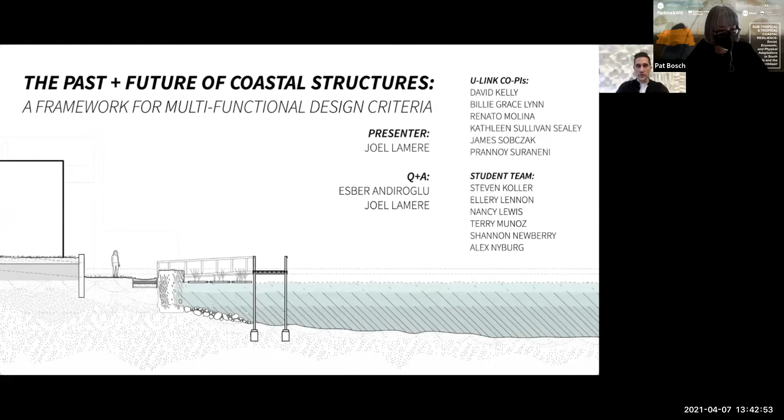The whole point of assembling a team like that is to confront complex problems, right? Those with competing criteria, with many stakeholders. An interdisciplinary team is the only way, I'd argue, to take on resiliency issues, particularly along coasts where so many intertwined problems come into contact with one another.

And so that line along coasts is where we dove into the problem as a team. Specifically, we focused on coastal structures. Now, we know this is only a piece of the larger resiliency puzzle, but we considered it a critical one, and one where actually it's a lack of interdisciplinary thinking which has given rise to so many of its problems. The failure of past walls has had something to do with their lack of multifunctionality, we'd say. They're conceived as single-purpose engineering marvels rather than players in larger ecosystems.

So our team set up a process revolving around incorporation of our many disciplines, one that had as many inputs and design criteria as members of the team, but that also incorporates a feedback loop of assessment and analysis, including economic analysis.

Our team started simply by looking at what is around us in South Florida. We traveled to many sites that exemplify a range of strategies for coastal protection. We saw, for instance, historic and contemporary seawalls, natural and green-gray systems, as well as various remediation efforts, which we documented, then analyzed in terms of management processes, restoration efforts, and protection strategies.

All this helped gain a better understanding and common language around coastal structures, of course, but more importantly, helped us organize the narrow set of design criteria for the wall types currently in use.

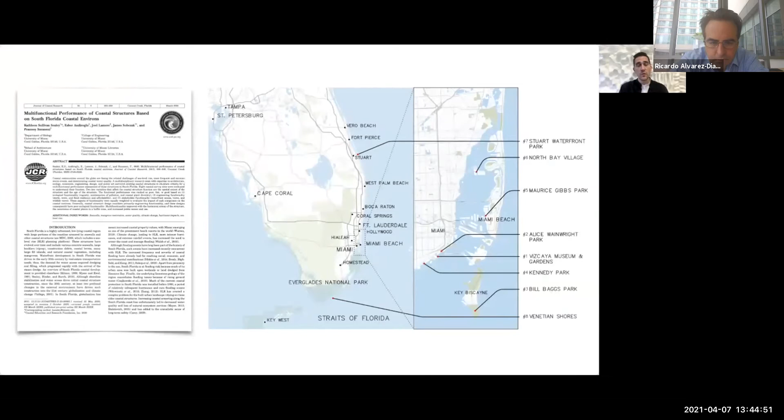This in turn led directly to a provisional framework for scoring seawalls in terms of these structures or criteria. That was the subject of our first published paper, Multifunctional Performance of Coastal Structures Based on South Florida Coastal Environments. In the paper, we gather and organize the documentation of each of these sites—there were 8 in all, including site-specific variables—and then we assess the walls along several axes, leading to numeric scores that we can then compile.

In keeping with the setup for our whole team, we needed to understand these structures in terms of multiple functions. The first of these layers, maybe the most obvious one, is the engineering functionality. This is pretty easy to understand: we need to know how well these structures are doing their basic job of protecting the shore from the influx of water due to tides and storm surge, how well it is retaining the land, and so on.

So the assessment criteria we used to score each wall included some obvious measures, width and height, but we also wanted to include an aspect of affordability in this, insofar as the engineering design has a say in the cost of the structures. This is really important to capture when you're analyzing coastal structures.

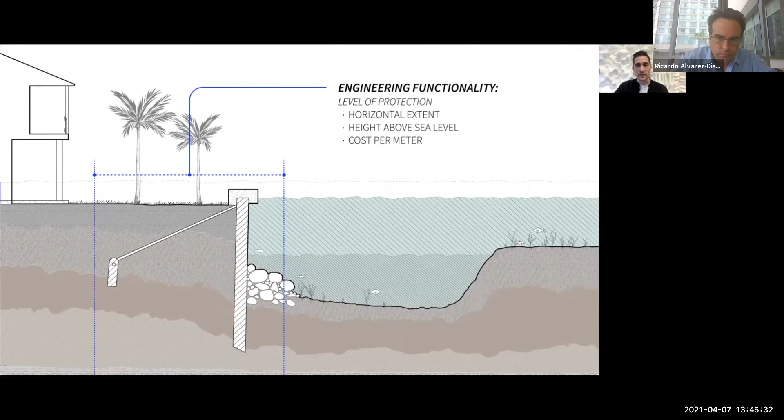The second layer of functionality we are calling the ecological functionality, which is to say, how the structure positively or negatively contributes to the overall ecosystem health. Obviously, there are several metrics we could have used for that as well, including rugosity, which is a measure of its textural depth, key for marine growth on that surface.

We also settled on figuring out how well the wall helps in the management of stormwater, which comes with all kinds of potential ecological impacts. And we even looked at diversity of nearby plant species as one assessment criteria.

The final layer of this assessment was in terms of stakeholder functionality, which is to say the value that these structures have to residents or other people who are directly in the vicinity and affected by it. The criteria here could be really broad, but we wanted to focus on questions of its public use, the quality of view that it allows, which according to a survey we conducted was of critical importance to users and property owners. And here we even looked at the diversity of bird species nearby, part of a metric of desirability, let's say.

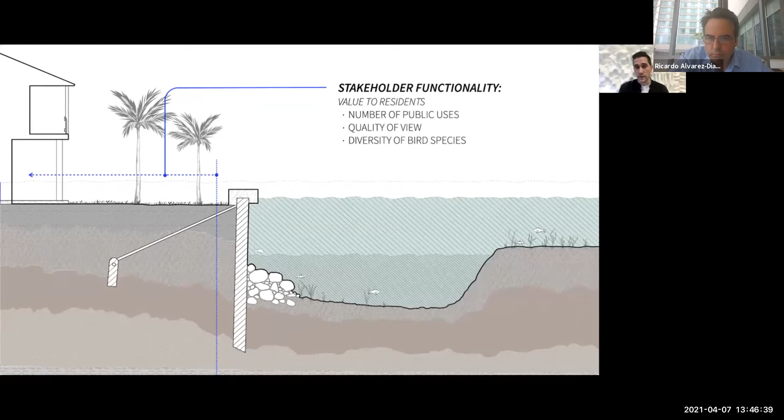So the paper compiles all of those assessments, scores them, and creates a composite total for each structure. We also included narrative descriptions to paint a full picture of what we observed, and we conclude the paper with a rigorous ranking based on the composite score of these existing structures, which also helps us sort, in very broad terms, which coastal strategies are more effectively addressing multifunctional demands.

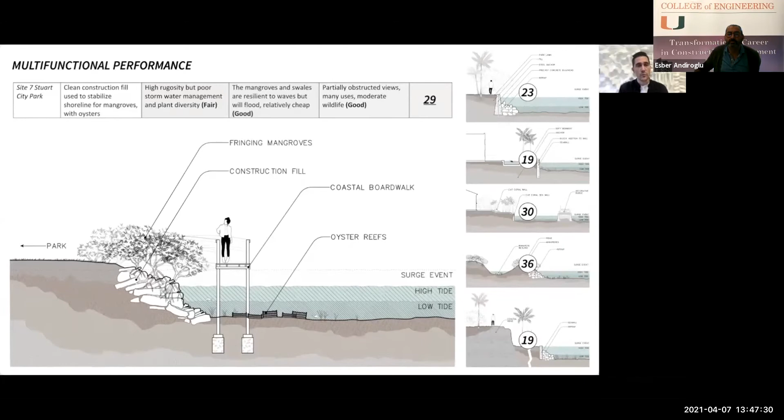And that's the real accomplishment of the paper, right? This framework for multifunctional assessment. That's why it's the key foundation from which a few other studies are naturally springing for us. This framework allows us first to assess the multifunctional performance of other seawalls. That's pretty clear. But also, very importantly, it works as a tool in the design and planning of new coastal interventions. This work is not purely for retrospective purposes, but meant to help us consider how to proceed in the future.

So that's what we're doing. One of our ongoing studies is a comprehensive mapping and assessment of the existing structures for all of Biscayne Bay. This involves a lot of spatial modeling, creating GIS polygons for each segment of the coast, and including attributes that include the type of coastal structure at each location, its condition, its jurisdiction, and of course the various functionality assessments based on our framework.

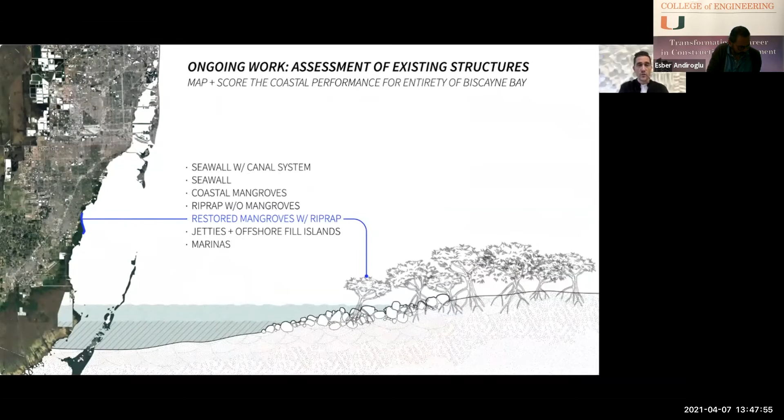We've also been using the assessment framework in preliminary ways to address site-specific concerns. It should, as we already said, be able to inflect how we design for interventions. So we were working with North Bay Village as a community partner to conduct research related to their needs at several sites of their choosing.

For those that don't know, North Bay Village is a set of islands nestled in Biscayne Bay between Miami Beach and Miami proper. The whole island is hovering really just a few feet above the current high tide and is already grappling with many of these issues associated with sea level rise. So really, it's an urgent need for them to start to address these questions.

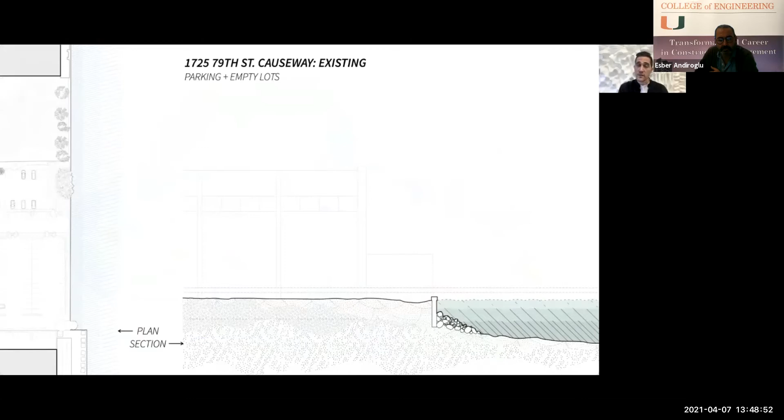One of the things we are doing for them is to simply look at several sites they have chosen for potential redevelopment and ask questions about how our observations and this multifunctional assessment framework might guide the design of coastal structures at the edges of those proposed or potential developments.

So, rather than thinking of a seawall as a kind of pure barrier or a single line, we really want to consider it as an important piece of a larger territory, one that interacts in all of these important ways with the local ecosystem. So in our proposal, we've assembled many of the components of successful strategies we've seen elsewhere.

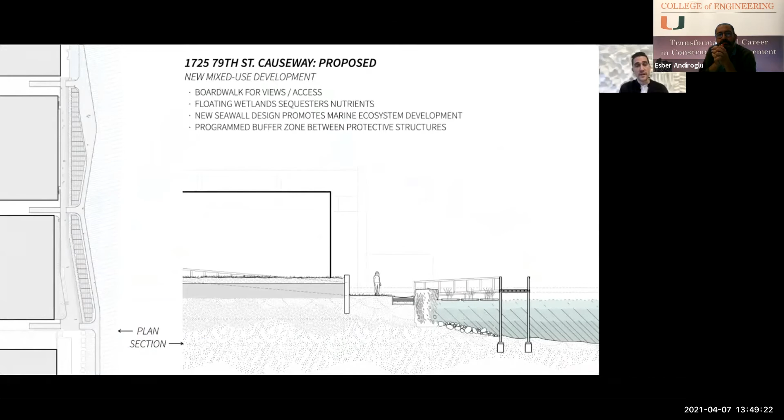In hopes of producing a zone at the edge of the site. This is not just ecologically forward thinking, which it definitely has to be, but is also responsive to stakeholder and engineering interests in inventive ways. Each design component really is meant to serve multiple functions in that way.

So for instance, the boardwalk, which serves to augment views and increase water access, both of which are highly valued by residents, also acts as structure and protection for a series of floating wetlands that help sequester nutrients. The seawall, for instance, is designed obviously as a protection, but also designed to promote marine ecosystem development.

And importantly, there's a buffer zone between protective seawalls. So we saw that if you can use depth along that coastal edge, you will be much more protected in many ways. But the key to using that correctly is to also program that zone, allowing people to use it for play or activities or retail. In that way, the space isn't lost, so to speak, in terms of the stakeholder value.

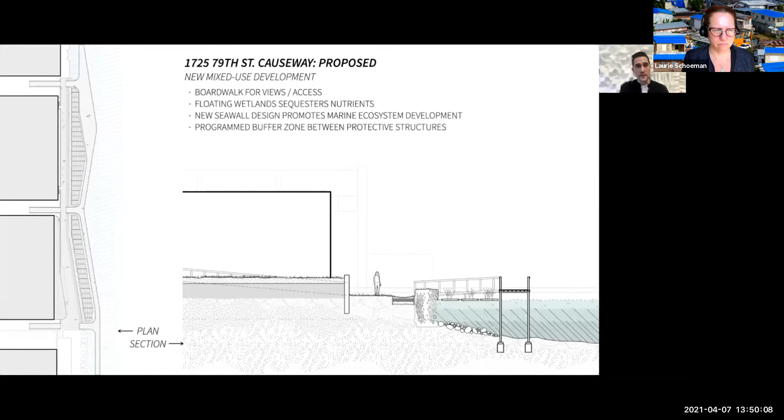And that brings us really to the last part of this presentation. The design work makes it very clear that there is a missing step: there should be a design guide that allows for comparison about the many options available for coastal structures. We identified this as a major gap in the process for designers and engineers who are tasked with taking on these complex problems, in a way that there's this litany of possibilities, but no way to compare and contrast from one to the other in a standardized way, which would be helpful as a designer.

So in response to this particular need, we began to create something like a design guide, a catalog of these past and future coastal structures.

So in order to be functional in this gap, in order for it to fulfill this need that we've identified, the guide needs to catalog coastal structures of many kinds. Conventional hard infrastructure, green-gray strategies, natural barriers, and so forth, but also the range from historical and existing structures to contemporary and emerging strategies that rely on newer technologies.

For each of these entries, it has to provide a useful summary of its overall value. It includes a narrative description for those things that can't be reduced too easily, but also a data-driven assessment, including our scoring for multifunctional performance. We basically need to be able to compare all of these coastal structures across the various criteria identified in our rubric.

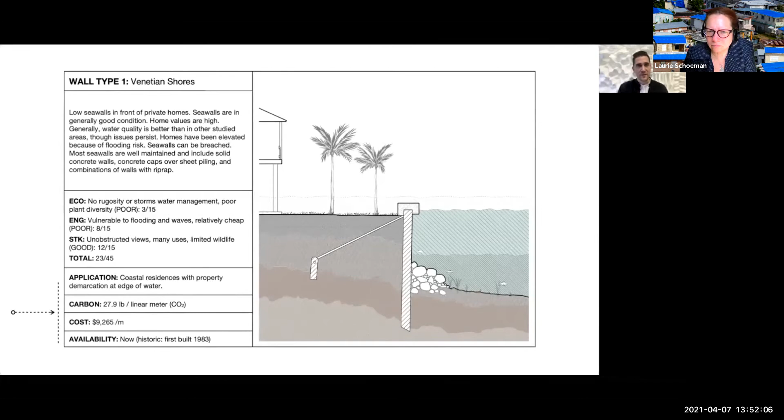We really need to put them side by side to rank them in these terms. And then we've included a few other clear metrics, including use case, carbon footprint, construction costs. I'll point out here that we've also included a line for availability, where for emerging technologies, we can indicate how many years away the technology seems to be. This is, of course, in some cases less certain than others, but we feel strongly that the kind of longer-term thinking necessary for addressing issues of resilience and climate change only works if we can see into the future a bit. We have to know what is on the horizon to know how we should act today.

So the catalog is ordered somewhat chronologically, beginning with the historical structure that you see on the left. That was one that we saw. And then leading into related contemporary structures and developments like the one on the right.

In this case, a University of Miami team, that includes 2 of our U-Link team members, developed a modified wall that uses GFRP, which stands for glass fiber reinforced polymers, instead of steel for rebar and tiebacks. The advantage here is pretty obvious, where steel corrosion is a massive problem and the cause of many seawall failures.

Critically, this design was included as one of the approved seawall design options in recent changes to the North Bay Village zoning code, making it an instance where research outcomes were directly merged with community needs through a collaborative process. And because it is an established innovation, there's good reason to include it in our catalog among other available strategies.

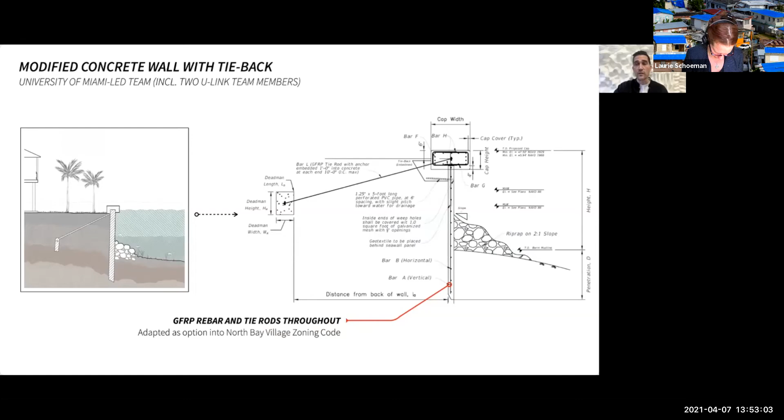And if we think a bit further out chronologically, we find some innovations that are currently under development, not too far away from being functional. For instance, this seawall cap for retrofit and repair purposes. There's a massive number of existing seawalls that are mildly damaged or simply too low, but maybe aren't in such bad shape that they need to be completely replaced or torn down.

Because that's the case, many people have been looking at the possibility of producing custom caps that add height to deal with sea level rise, cover flaws, and even potentially shore up the structure itself. And in keeping with the multifunctional theme running throughout this whole presentation, these caps might add other functions in this retrofitting process, like filtration systems for dealing with runoff, or planters for sequestering nutrients, or textures to encourage marine growth through rugosity, and so on.

More or less as optional add-ins to the cap itself. The development of these custom caps is already underway and maybe just a couple years out and are listed as such in the catalog. But there are some new technologies that are right on the horizon that promise to fundamentally alter some of these strategies.

So for example, in a few years, 3D printing concrete seawall caps may be possible. We already see 3D printing of concrete in domestic applications. And this promises to be cheaper and more effective. So as a designer, it is useful to have a kind of time horizon for this technology.

Maybe it's better not to dive into using the previous caps that we showed, which would require a ton of measuring, custom formwork for every single different seawall, offsite casting and shipping to the site, when you could instead scan a wall to get a digital model of the exact existing geometry, then use a parametric process to define the layering patterns, and then print directly in situ.

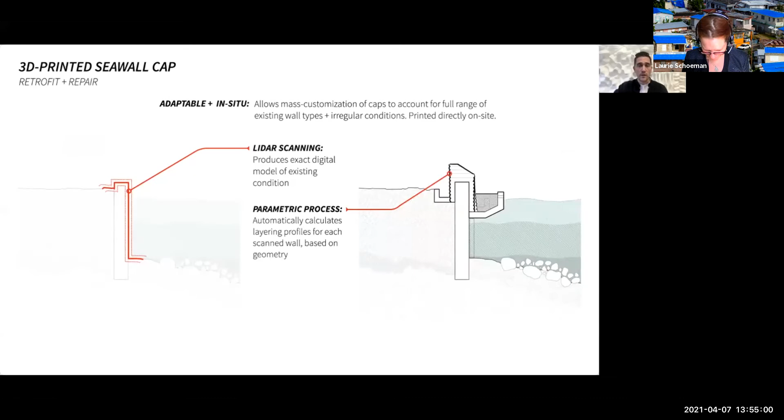And eventually this 3D printing process will be useful for even much more robust purposes. You will be able to engage both water and structural functions directly. So rather than just a cap, you will be able to produce full walls in this way.

So we should admit that some of this is in a very fundamental research phase, and so it has to be a guess about how soon down the line this may be possible. We're not going to know that exactly. We have listed 5 to 10 years in our chart here based on the rate we've seen other concrete 3D printing applications evolve, but who knows exactly? That's why we consider this a living document that will need continual updating to reflect evolving knowledge.

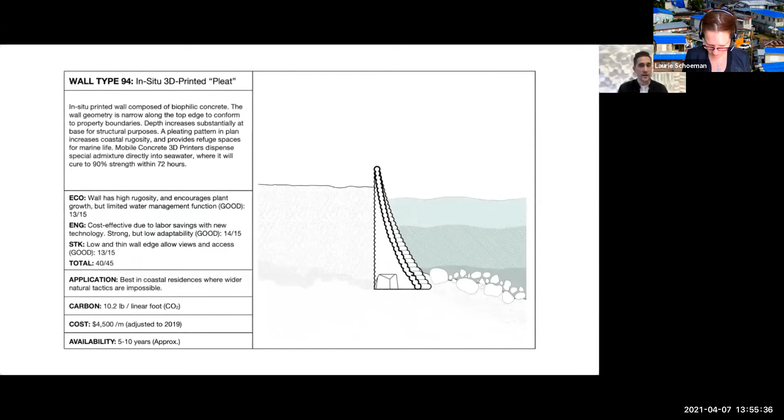As a team, we've been looking at what those walls might look like, these 3D printed seawalls. Much of my own research is in digital fabrication, emerging means of construction, and the relationship between form and structure. So this has a pretty direct relationship to that.

I've come up with what I'm calling the pleat, just to exemplify one such possibility of a wall. The premise behind this project is that it's 3D printed in situ, meaning it doesn't require any formwork and minimal excavation and shoring. The profile itself reaches a linear edge at the top to maintain the definition of the property line, but gets thickened or deepened at the base.

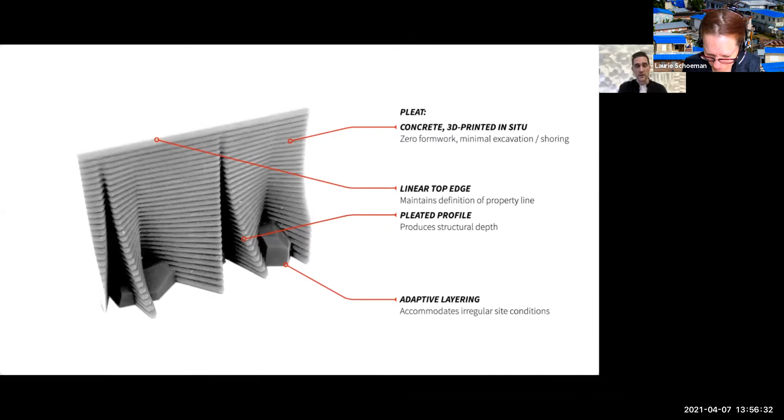For obvious structural reasons, to resist overturn and the like. And it wouldn't be a 3D printed wall if it didn't have some sort of adaptivity or adaptation built into it. The idea here is that adaptive layering would allow for the many irregular kinds of site conditions experienced at shorelines.

You'll notice there's real optimism in this catalog. The further we get out chronologically, the more we see designs that are truly multifunctional and therefore score higher in our assessment framework. So long as the technology continues to develop as it already has, we can hope to arrive at schemes like the one I've designed here eventually.

Within a single wall section, this one is trying to take on three major tasks: filtration, structure, and the production of a well-calibrated marine habitat. This concrete sponge is a continuous shell, which is an extremely efficient structural type using very little material to maximal ends. It's a single print that performs varied functions, deploying material resources sparsely but effectively.

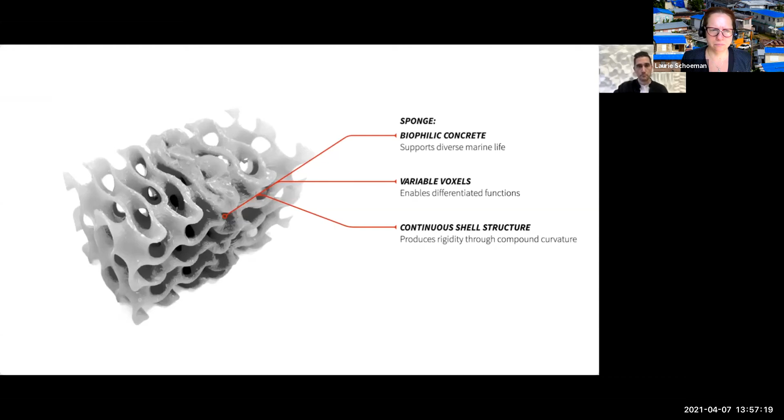I want to conclude by reiterating that this catalog is a work in progress and will always be a work in progress. By definition, it needs to be a living document. Our hope is to get it up to at least some distributable quality level soon, though, as is the case with some of the wall designs we've already shown here, the timeline for that distribution would be a bit speculative at this point.

Thanks, and I look forward to answering any questions you may have during the Q&A, where I will be joined by my colleague, Esber Andiroglu.

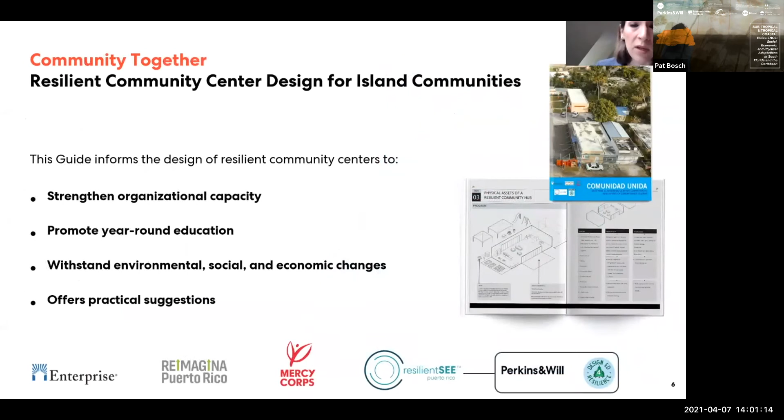I'd like to point out an important resource that we've led with many collaborators, which you see here on screen. It has guided our work with communities seeking to create resilient community centers. The guide answers the question: what is a resilient center and what attributes should it possess? It's organized in four parts, beginning with organizational capacity, operations, and physical assets. My personal favorite is chapter 4, which covers a diversity of exemplary case studies.

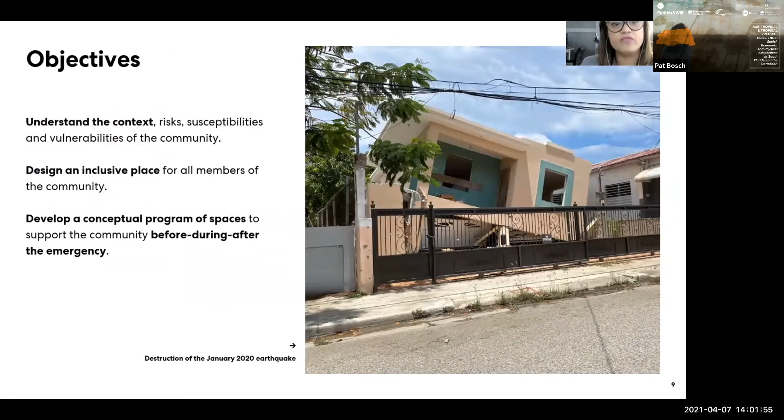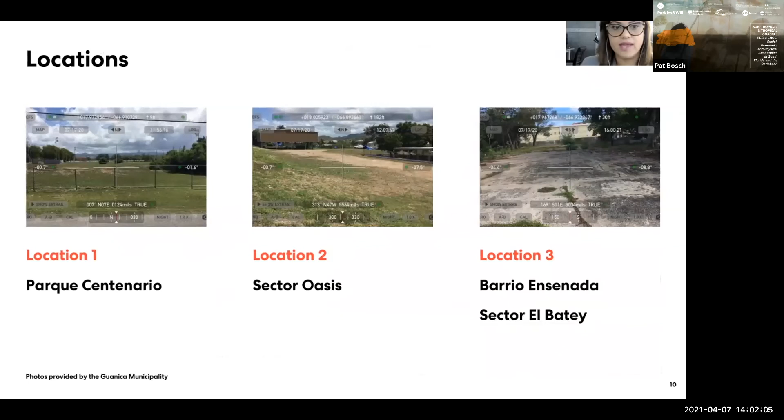The objectives of this project revolve around co-creation, and to do that we had to understand the context first, to design an inclusive space and develop a conceptual program of spaces to support the community before, during, and after the emergency. In working with the municipality, they offered these 3 locations. Each site is within a neighborhood and offers development areas ranging in capacity. In the larger picture of the municipality limits, they are located as shown and can shelter the target vulnerable population desired.

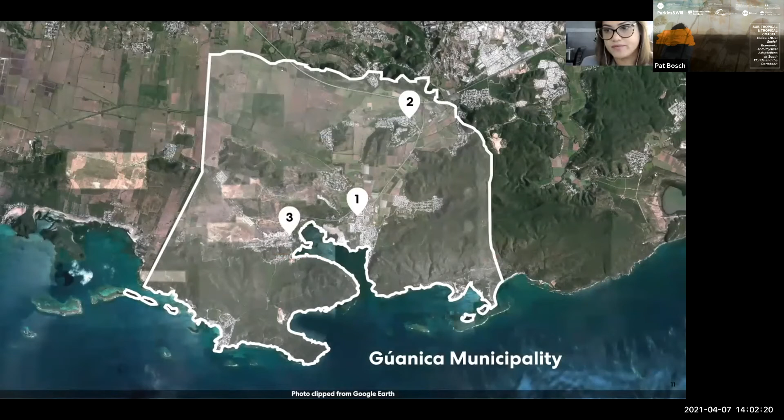In the past 3+ years, the island has experienced severe hurricanes, a major earthquake, even a meteorite, which luckily landed in the Atlantic Ocean, and of course the global pandemic. Guánica is susceptible to flooding, landslides, and structure collapse. It has vulnerabilities such as formal and informal settlement damage and collapse, population displacement due to flooding, compromised health, safety, wellness, communication, and food supply disruption.

You can see here the severity of the earthquake damage in informal construction.

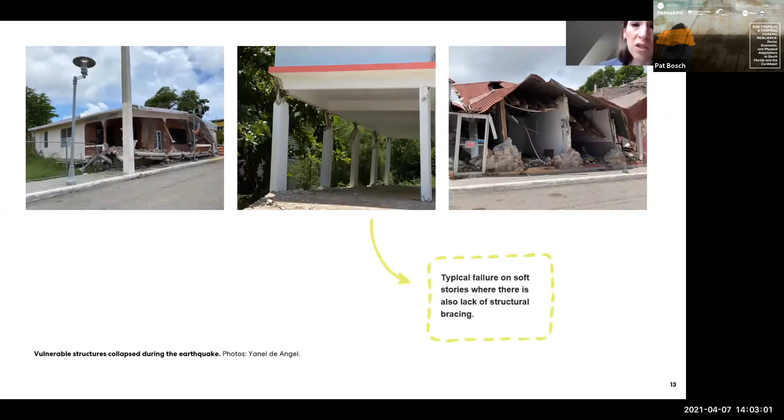As we consider inclusive design for a vulnerable population, we ask some critical questions to enable discussion. Who is this population seeking shelter? What do they bring with them? What do they fear? What health issues might they have? And how do they navigate the shelter once they are there?

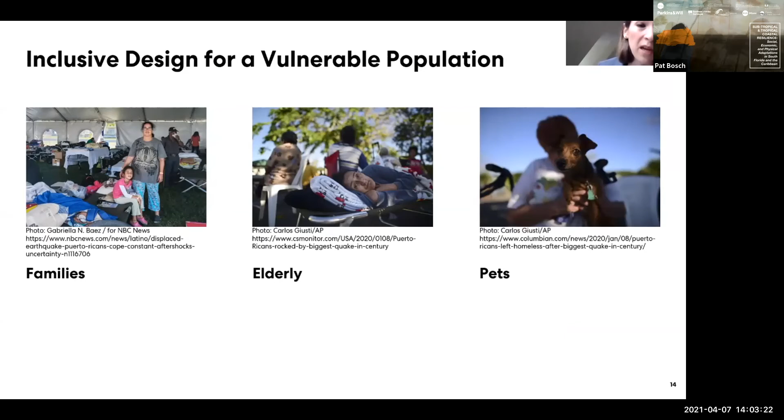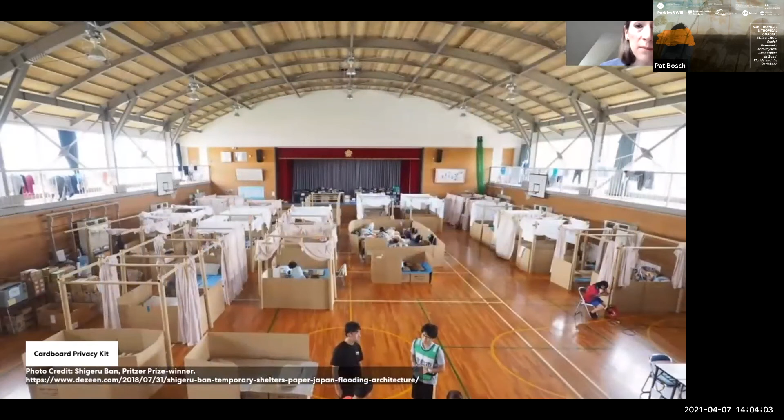From the precedents we studied, this Japanese system really stood out for speed of assembly, affordability, flexibility, and the privacy it provides. It's a simple modular cardboard system with curtains for privacy. It's very close to what we had in mind, and you'll be seeing that coming up.

Hello again, I'm Danniely, visiting lecturer at the University of Illinois and the Rhode Island School of Design, and a collaborator with Resiliency. In our proposal, we achieved a sizable capacity for the 3 shelters for each emergency scenario, hurricane and earthquake. Since the municipality may apply for FEMA funding, we also tallied the occupant density for the FEMA Community Safe Room.

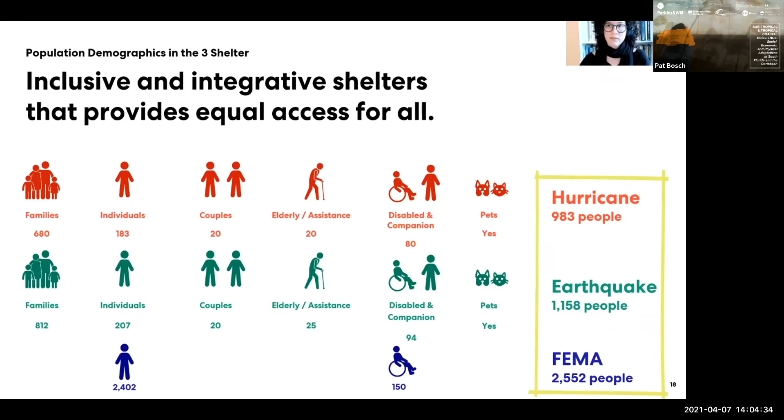The project team created a holistic, replicable, and scalable shelter framework composed of key elements. The shelters function as independent community centers with programs that serve the community, including 1, 2, or 3 basketball courts for multi-purpose activities. The centers transform into shelters during emergencies.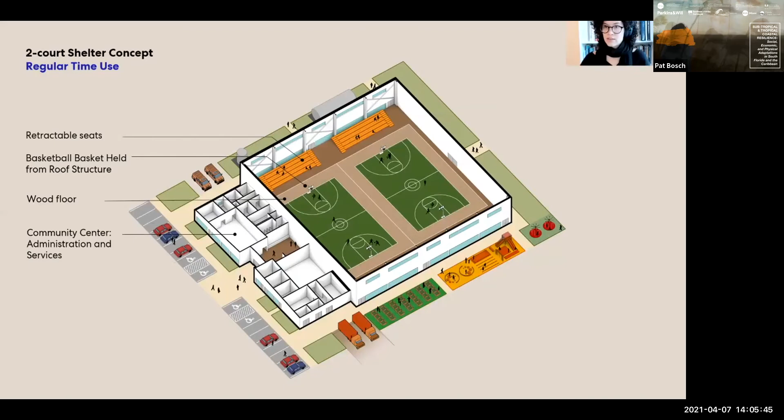For year-round use, we integrated inclusive spaces for all, including a mother's room, a quiet room for people with sensory sensitivity, and a fully accessible adult changing room that doubles as a gender-inclusive bathroom.

During a hurricane scenario, before and during the event, the main services are contained within the building, as well as the shelter space. The colorful volumes represent various sizes of temporary shelter units. Temporary toilets, sinks, and showers are shown in purple and blue.

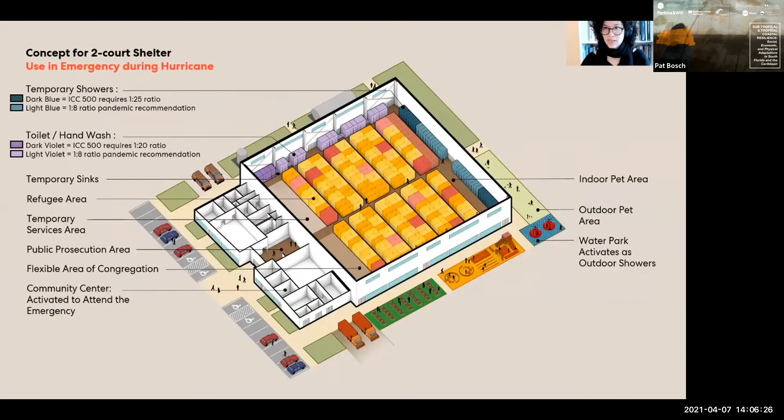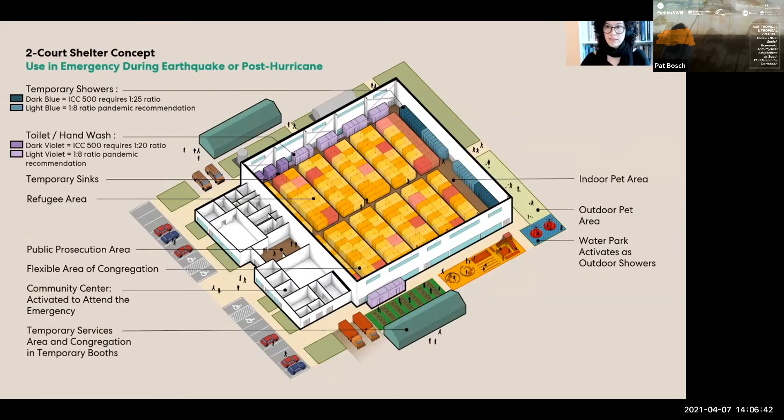After the hurricane, or during an earthquake, additional services can take place in outdoor temporary tents to increase occupant density. I want to note that our team incorporated COVID-19 provisions, anticipating the possibility of a combined natural disaster and pandemic event.

I am José Sanchez, Senior Engineer at Tipping Structural Engineers and co-founder of Voluntariado of Engineers and Professionals of Puerto Rico. This axonometric view depicts the structural system of the shelter. The structure consists of concrete in the front, where the entrance and offices are located, and in the back, the structure was designed as structural steel to provide large open areas at the main shelter area.

The shelter was designed per the Puerto Rico Building Code 2018 version, considering the hazards of the island, including hurricane wind load forces and earthquake demands for the area of Gúanica. This shelter was designed to resist winds up to 182 miles per hour and seismic demands up to 1 G of force. To put this wind velocity in perspective, it's 3 times the velocity you are allowed to travel by car on a highway. These speeds result from revisions made to the code after Hurricane Maria hit Puerto Rico in 2017.

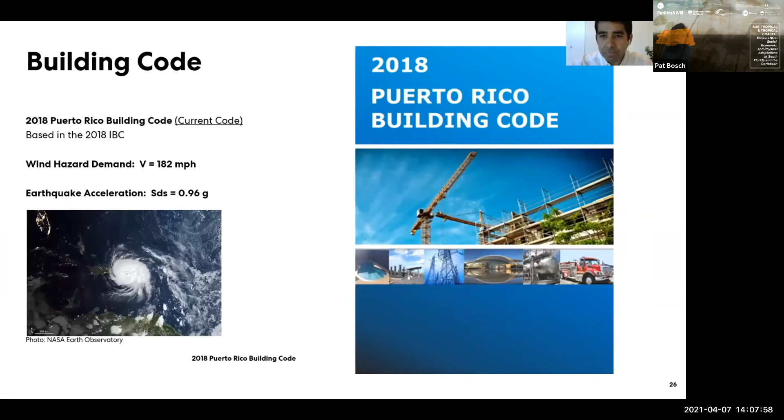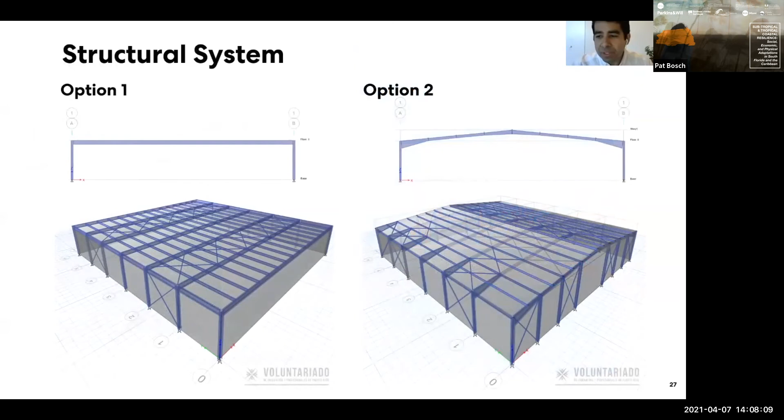Two structural options were considered during the design phase to provide flexibility and strength for the building code, shown in these two images.

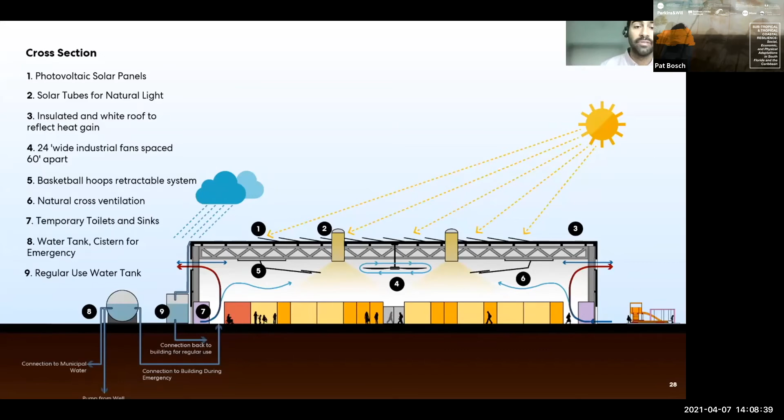Hello again, I'm Manuel, licensed engineer, resiliency collaborator, and analytics lead for WSP's Built Ecology Sustainable Design Practice. This section illustrates different resilience strategies, including passive survivability through harvesting natural light, natural ventilation, and daylighting. There are also water cisterns and renewable energy to allow the center to survive for a few days independent of municipal services.

Before estimating water and energy loads for all 3 scenarios, we first determine occupancy during normal operations and sheltering events that will drive resource consumption.

We follow ASHRAE 62.1 occupancy rates and supplemented our findings with FEMA's community safe room guidelines during emergency response. Preliminary loads follow USGBC's LEED design guidelines for indoor flushing and flow fixtures, as well as water use.

A supplemental water balance calculator was included to estimate the water storage tank needed to satisfy a 3-day blackout demand, and rainwater capture potential for each scenario.

On the energy side, preliminary loads follow ASHRAE 90.1 and ASHRAE fundamental handbook guidelines to determine schedules, lighting, and equipment power densities, but also human heat generation to estimate cooling load during sheltering events and normal operations.

Lastly, using Ensenada's Gúanica weather file and PV Watts software, it was determined that 20% of roof space dedicated to solar PV can provide net zero operation during business as usual, and offset up to 88% of energy demand during emergency operation.

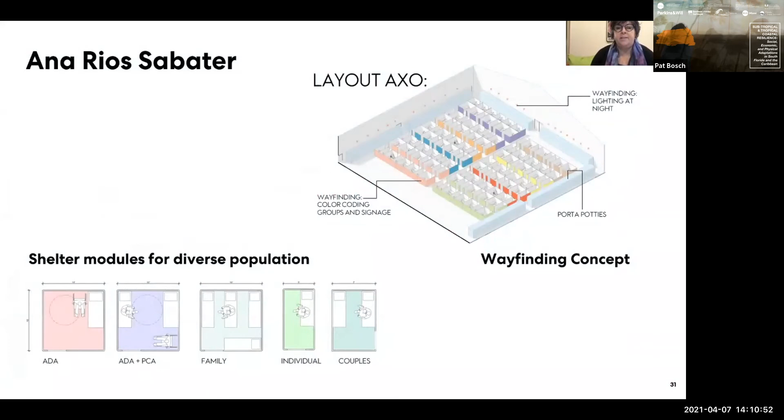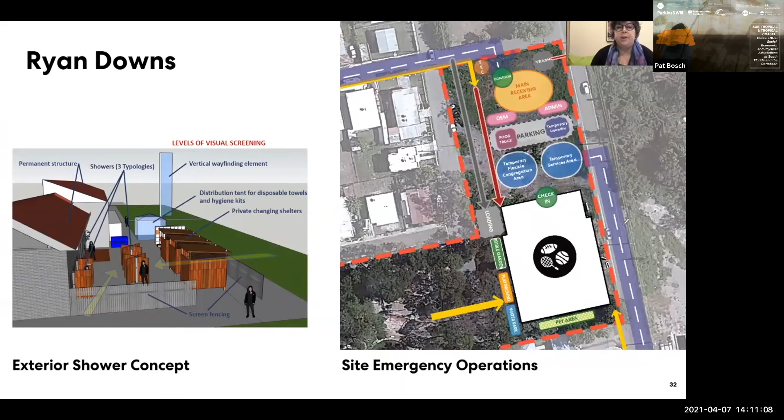Ryan Downs, a student and registered architect with prior FEMA experience, developed a site logistic plan for emergency operations and an exterior shower concept exploring levels of privacy for inclusive design.

I developed the operational policy based on my expertise and prior experience as an architectural designer for the Institute for Human-Centered Design, an international inclusive design nonprofit.

With IHCD, I co-created an ADA and inclusive emergency community shelter checklist and policy program. It incorporated ADA, FEMA, and inclusive design requirements and recommendations.

We learned that remote collaboration is a powerful way to connect professionals to contribute expertise. We highly recommend engaging academic partners. The BAC brought a different perspective, depth, and genuine investment in nourishing the next generation.

We also learned that a facilitating municipality is critical, but needs to be paired with community-based organization involvement. We recognize there are many obstacles, inequities, and unfairness in providing direct relief to communities, but we are determined to help overcome them.

We want to thank the former mayor of Gúanica, Santos Seda at the time, Reverend Benjamin Toro from Bet El Torre Fuerte Church, and Juan Carlos Alvarez, FEMA Municipal Supervisor, whose collaboration was critical.

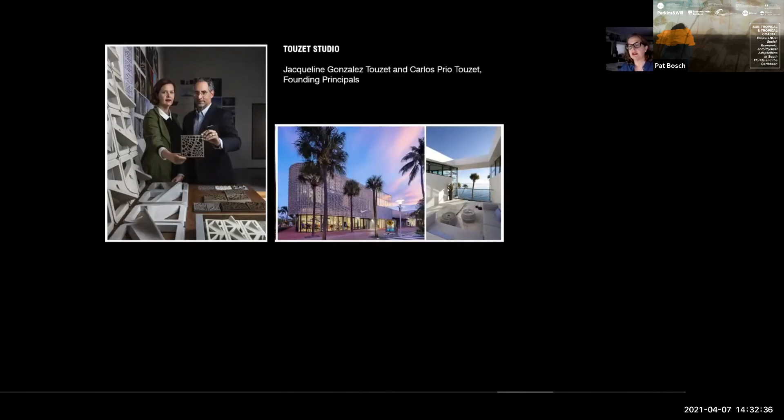Something we're very passionate and fond of, because both of us are Cuban - born in Cuba, but we've been practicing in this region for all of our professional lives, with some exceptions in Europe and Asia.

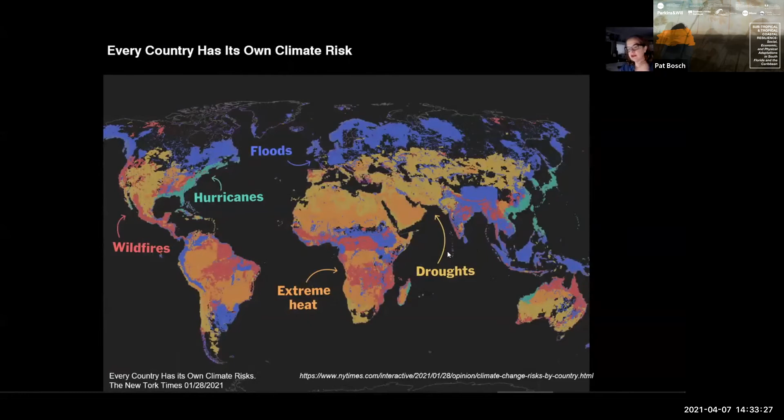What I want to talk to you about today is that sometimes people ask us, well, why would you practice in Miami? Our response is, show us a place on the globe that isn't going to be affected by climate change. This is where we're from, and we're very proud of being from here. Granted, our challenges are not small, they're quite intense, but I think everyone agrees we're all facing quite a few challenges. The New York Times says every country has its own climate risk, and this region is probably expert in designing already for some of these risks.

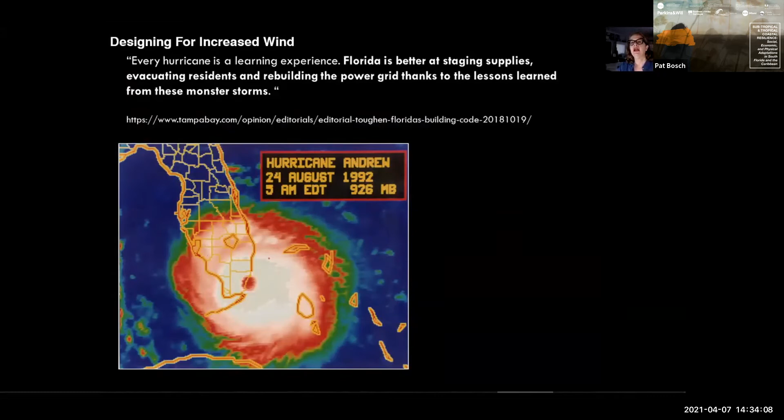One of them, of course, is wind. I came of age and graduated in 1992, the year of Hurricane Andrew, and that was an incredibly powerful learning experience for me. It really shaped the way I view the importance of design, architecture, and codes in saving lives and preparing a region. We learned that this type of experience, and we have centuries of it if you're from this region, if you do it right, you can learn to be better prepared for the next one, and become expert in a way at community resilience from understanding what happened.

What was important about Hurricane Andrew is that we changed our code as a result of what happened. We understood that certain areas got much more damage than others. What was really powerful was that architects set about understanding, well, what can we do? What can we change in our code to make us safer the next time?

If you look at what we did, some of those things were very simple and inexpensive, costing pennies or a dollar to put a strap on a rafter, change the type of fasteners, the spacing, enforce the code to make sure people weren't cutting corners. As a result, we became the model for the region on how to build stronger, more resilient, because if you don't get as much damage and can come back faster, by definition that's more resilient. So some of those lessons don't need to be expensive, though obviously some of them are.

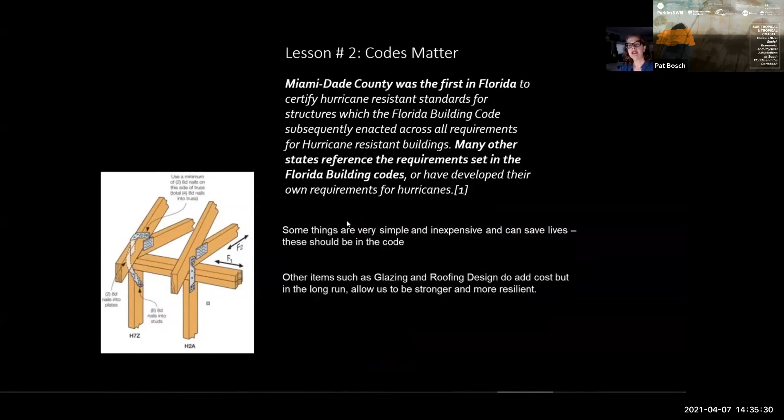If we had sat there back in 1992 and really thought about how much money it was going to cost to put impact-resistant glazing on all our skyscrapers and new buildings, I think we would have all been very daunted by that. But in fact, we did it. As a result, we're in a much better place than we would have been, and we're much more viable as a community, and we continue to grow because of that investment we made then.

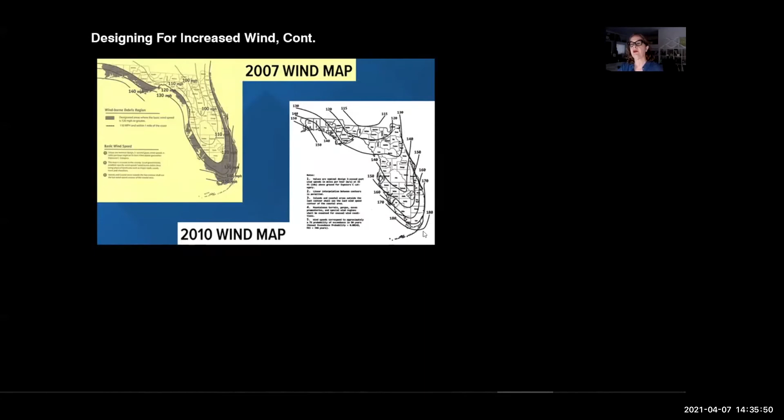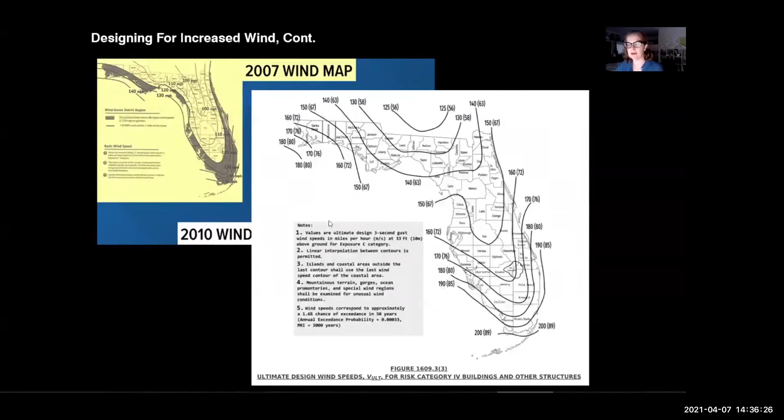That's what I'm hoping to see us do when it comes to resiliency in other areas, whether it's water or being more sustainable, so we can minimize the overall damage that's coming. But water is not an easy one. I won't get into it too much since I'm sure it's being discussed at this conference in depth, but water is coming from everywhere, basically, and how do you design for that? What does that look like? That's one of the things I really want to show you—what it can look like, and what cities are asking for and what we're doing.

We know there's a lot of lessons from early builders, and I'll say this as a proud Caribeña - we are experts since the earliest Tainos built on this land, to the Cuban Americans, to the Bahamians. So many builders came to South Florida. The Bahamian builders were called the Wayfinders, who built much of what we know as Coconut Grove. All of those lessons are important and valid, and we learn from them.

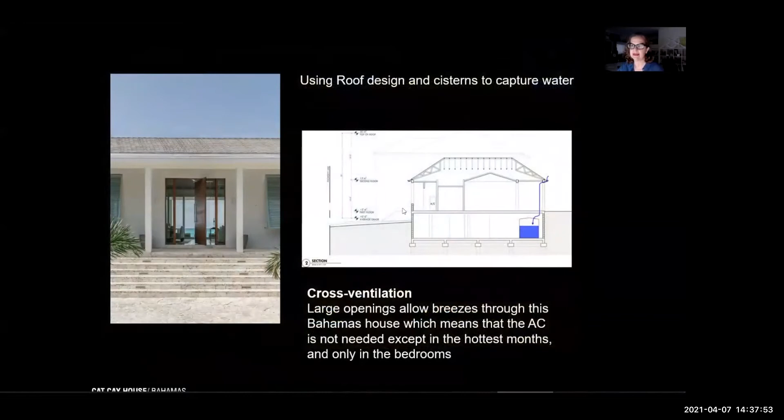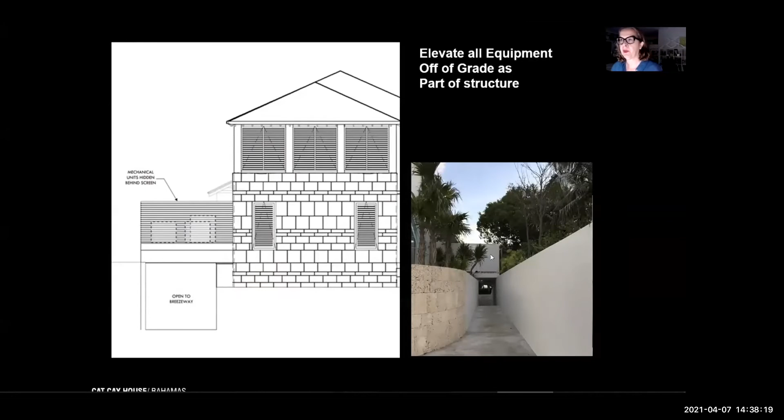When we look at the Bahamas and doing work there, we still are doing it. You can see that even this building has the cisterns, it has the cross ventilation. Now though, we're talking about elevating all the MEP structures, because people would have put it on a slab on grade before. Well, that's not smart to do anymore. Every house we design, whether in the Caribbean or in Florida, we're elevating and creating a structure for all of these mechanical systems. And we're designing as if we're in a flood zone no matter where we are, because the fact of the matter is we are in a flood zone.

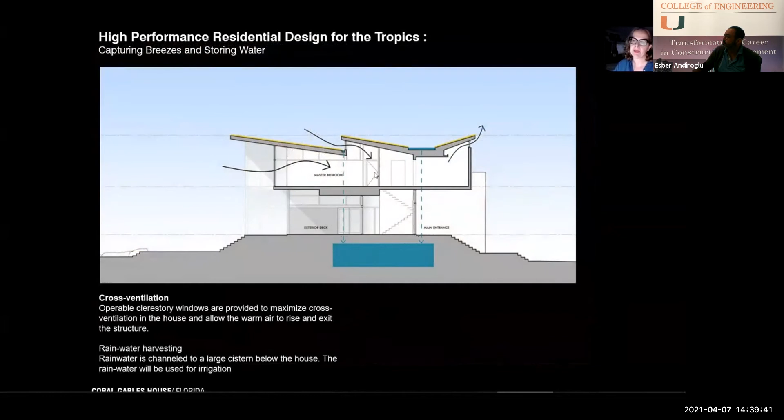But what started to become different for us in this project was the idea of a high performance roof that did all of those things - the cistern, the cross ventilation, etc. But it also captured energy and sun - that was the first solar roof we did, 12 years ago. And we've been hooked on solar ever since.

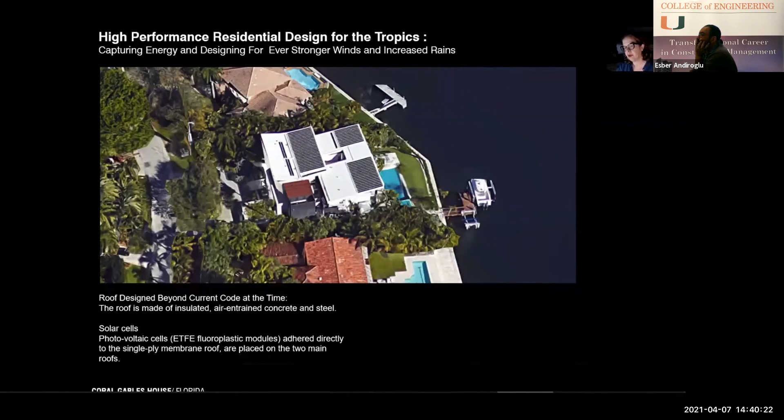We want to do solar everywhere because we believe in the sunshine state, and all of our regions should be solar at this scale, at the single family scale. We'll also show you one at the city scale, as an urban microgrid. We believe this is the future - every roof should be a high performance roof. If it's not capturing energy, it's directing rainwater into cisterns, or we've done green roofs and vegetated roofs, and now we're even looking at farming on roofs. So the roof has a big role to play in the future of our region.

This is another example of the materials - a combination of local materials and high-tech materials. This isn't wood, it's rice husks made to look like wood, so it requires less maintenance and uses recycled materials. And again, lifting up the mechanical equipment.

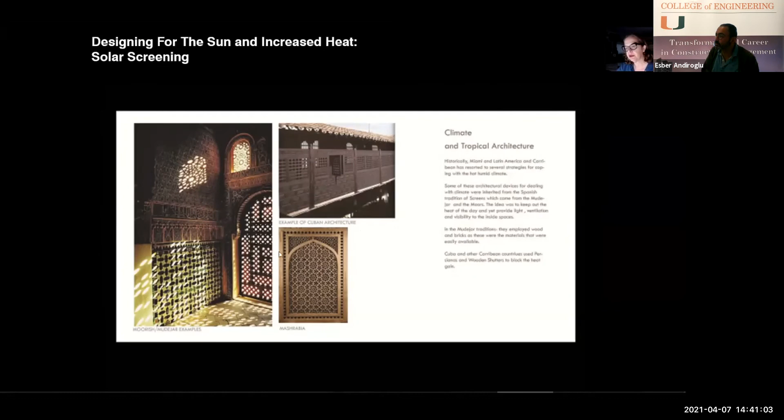Then there's the idea of shading for the sun - again, nothing new in our region. We've been doing sun shading from the tropical blinding sun since we learned it from the Moors, and it came down to Cuba and other tropical areas in the Caribbean. It's nothing new, but we've taken it to a different level with more resilient materials - ones that can withstand the structural requirements and, interestingly, have some microbial and flood resistant qualities we're very interested in.

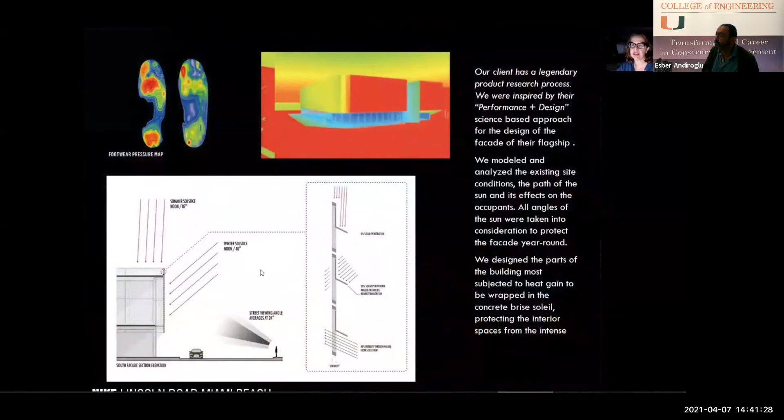This project is designed for Nike, a global design technology company very interested in performance. They told us they're a high performance client, and we said great, let's design your building the way you design your shoes - let's look at the sun, let's look at where we need to shade, because they wanted to do a glass box. We said no, given your orientation, you're going to be in a very uncomfortable position.

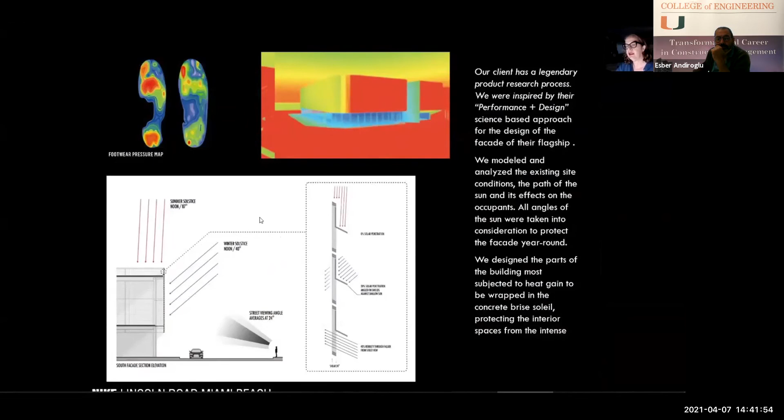So they said, well, we want to do this screen, but we'd like to do it in a dark metal, which is what we've done in Portland and Seattle. And we said, that is not a tropical material, that is not a Miami material. So we convinced them to take that idea and transformed it into something that could be cast.

Into a lightweight concrete brise-soleil, that's the Ductal material I mentioned. The advantages were that it was non-porous, lighter, and could be prefabricated. It was a great flood resistant material as far as we're concerned, and we're fascinated by it, so we experimented with it.

This is one of two projects we've used this material in. What we love about it is that it can be perforated, it can be cast, you can 3D print the mold and then make the facade out of it. It was a really interesting process that I don't have time to get into, but it's much lighter than regular concrete, and the pores are much tighter. So we like that about it.

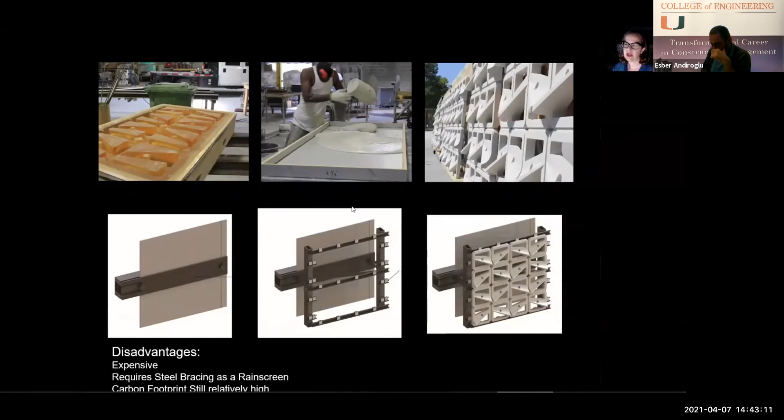The disadvantage we found, at least in some applications, is to design for our wind loads, the amount of steel was a lot, and we thought that was expensive. Still, of course, concrete has a relatively high carbon footprint, and we are very much, all of us in this region, a concrete oriented building construction. So we do believe there is real importance in solving for and working with concrete.

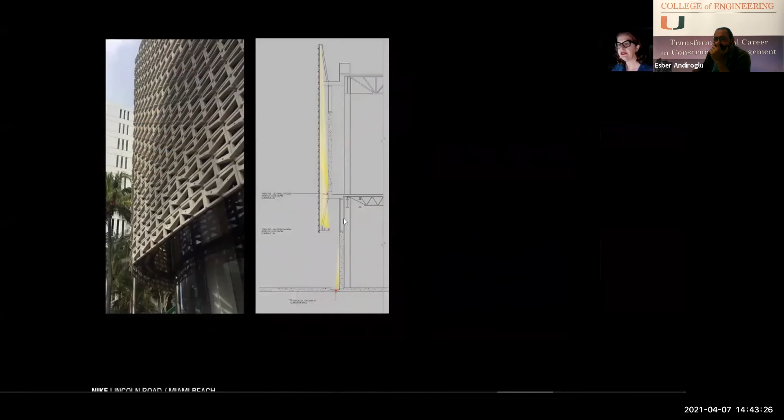This is what we were able to do, which is to perforate that skin and create a lantern at night that was beautiful. So from an architectural standpoint, we loved it, but we still have a ways to go.

And the technology is really quite interesting right now, because this doesn't rely on metal for reinforcement. It had fiber reinforcement. The next generation of concrete is also glass fiber reinforcement, which is really interesting, where they get rid of the rebar completely and use glass fibers, which we are following very closely.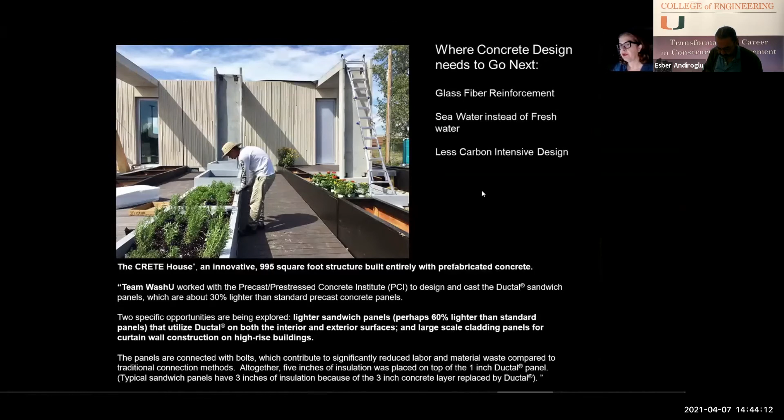We were at the Decathlon, which we go to every time there is one, to see what they're doing for houses that get built off the grid. The one we thought was most intriguing for our region was this one, because it was made of the Ductal we were experimenting with. It has those qualities that if the flood waters rise, it will not allow anything to grow on it, because the pores are really tight, and it is lighter than regular concrete.

So this is a technology and a material to watch. We're in the process, on every project that we can, trying to move the ball forward and study it. And I encourage everybody to really figure out how we can improve concrete.

We do travel a lot to see how others are living and building with water, because we are obviously on the front lines of that. This was from a trip to the Netherlands, and we hear a lot about the Netherlands.

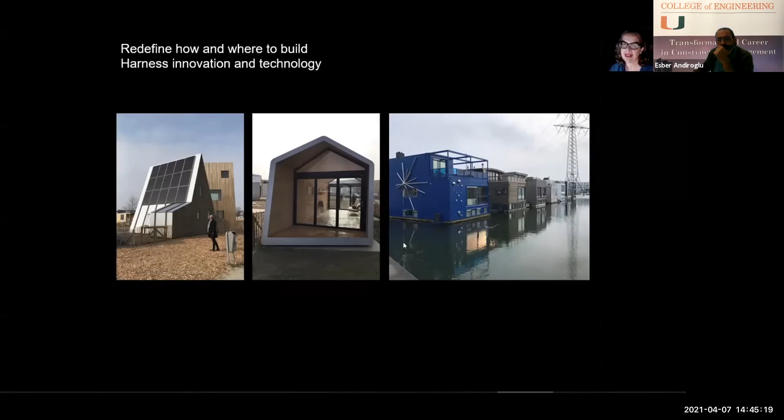One of the things I like about it is, for us, we think we should be like the Netherlands in that we should be exporting knowledge to the rest of the world for how to build on the coast, but for our climate and for our culture, which is different. I want to stress that, because sometimes people think, well, why don't we do what the Dutch are doing, or the Germans are doing, or what they did in Harvard, or what they're doing in the Northeast. The reality is that our climate is very different. So while the lessons are important and the can-do attitude is something that I love, I think we always have to be based in our own region and our own materiality.

Really quickly, this is a couple of new projects that I'm going to show you, two that are in design and one that is in construction.

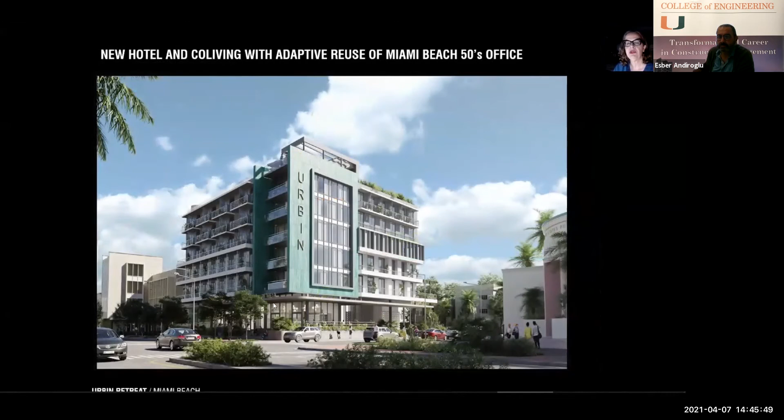This is an example of what the city is now asking for, which is for us to incorporate freeboard, which is simply lifting the building to have a greater height on the ground floor. We asked for them to change the street trees on this because we wanted to work with our landscape architect on this. It's Cadence. We talked about doing the whole project as an ecosystem, with an existing building, a 1950s office that we were keeping and rehabbing, and a new construction.

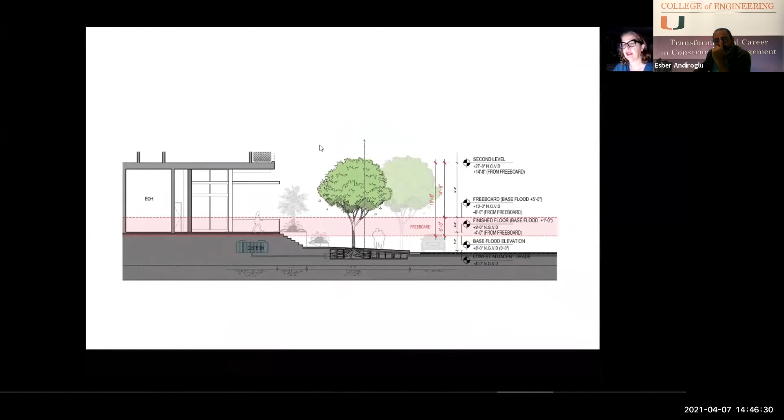We added a series of shade trees and rain gardens to capture water and runoff from the roofs and put them into cisterns, which we're really excited about. Instead of doing the palm trees they had asked us to do, this will provide shade, and the root systems of those trees are designed to percolate and hold water, in addition to the water run off the roof and held in cisterns. You can see here how that system would work, and it's being done in Miami Beach.

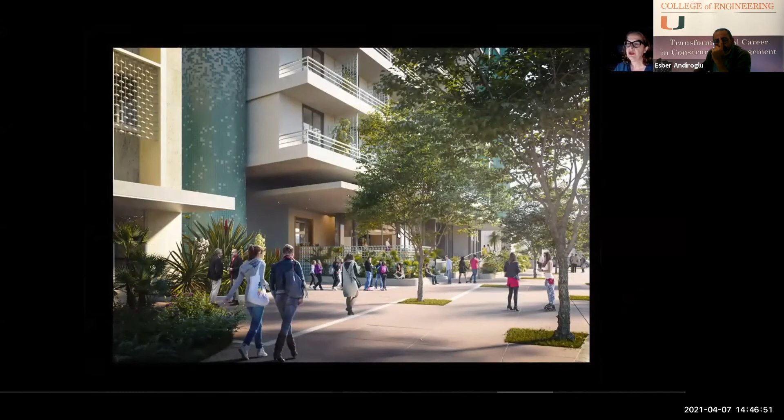It's not new, but the idea people get concerned about is how to design a building that in the future can be lifted. This is one way: you design a beautiful green edge, and in the future, when the street gets raised, you have enough height in that first floor for the building to adapt. We adaptively reuse and recycle the building next to us, which is really good from a net carbon standpoint. For new buildings, we plan for the future and build in that extra layer of resiliency that can accept additional height.

Here's another one in Wynwood, a different expression because it's a different neighborhood. This is more of an industrial, art-focused neighborhood, but it was really about collecting water again on the roof and making that visible to the public, to residents, and to people who would come stay at the hotel.

We gave back all of this land, and the client agreed to make that a park, which we thought was fabulous because there was such a need for green space. Trees are such a partner, and we're humbled at how much of this green and blue infrastructure work is a partnership with our landscape architects.

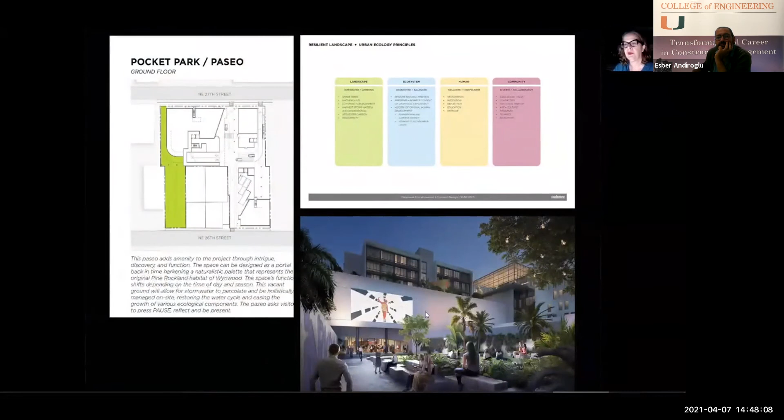You can see there's a community farm on the roof at the front edge, and recreational green areas in the back. This one incorporates a paseo, a green space with shady trees, in an area that doesn't have any parks, so we thought that was important as well.

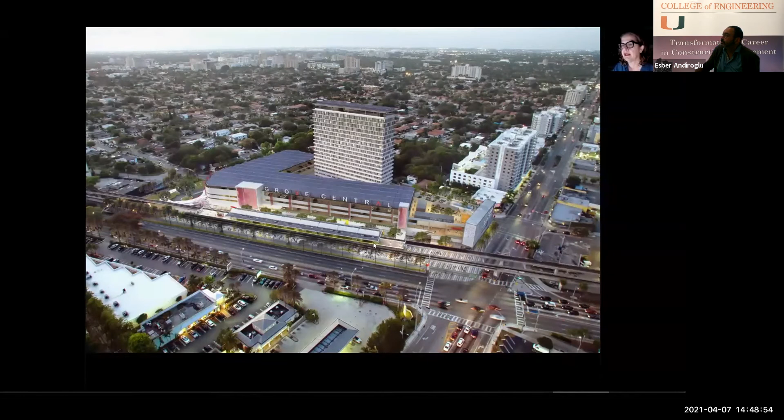Finally, this is Grove Central, which is under construction right now. It's a co-living rental apartment building, transit-oriented design, built right next to the Coconut Grove Metrorail station. That's really important because the more density you build on higher ground, where the rail is, the better. The Metrorail is on higher ground in Florida, so it's important to build density next to transit to get people out of their cars, to protect people by keeping them on higher ground, and to have equity in different apartment sizes and price points so people can get to their jobs without using a car.

So from a net carbon standpoint, getting people off their cars and reducing that dependency is very important in Miami. This shows some of the components: we have the residential, the co-living, the solar. We use the rooftop for social space as well, but you can see this roof is also producing energy.

We were working with FPL on this to make it an urban microgrid. Right now it's planned for phase two, but what we learned is that every roof can be planned for with very minimal cost for uplift. The conduit can be laid and the battery rooms can be placed so it's future-proofed, so when the political and cost arrangements become more conducive to adding that, it's ready. If you try to add it after the fact, the cost is exponentially higher. So every architect and builder should really be thinking about the future—even if you can't afford to do it in the first phase, plan for it in the second.

And this is next to the Underline park, a linear park that runs through it. So now we have transit, bikes, walking, retail, and people living right up against the station, which for us is really important in a resilient future where you bring everything together.

The idea of having the solar really was, if you have shopping and all the essential goods and services there—pharmacies, banks—then if the grid can support it, the idea was that if power goes out, you have an urban microgrid. It can be an island of resiliency until the power comes back.

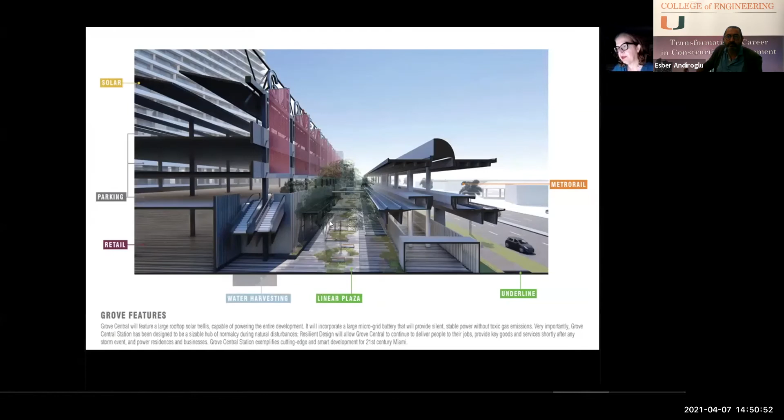We believe that kind of resilient hub, community resilient hub, is really important in the future, and we are strong proponents of that. I'll leave you with some images of things we've done with others. We're very humbled to work with some of the best landscape architects.

Since we care so much about this region and want it to thrive into the future, we do think that architects have a very important role to play in that. Thank you very much.